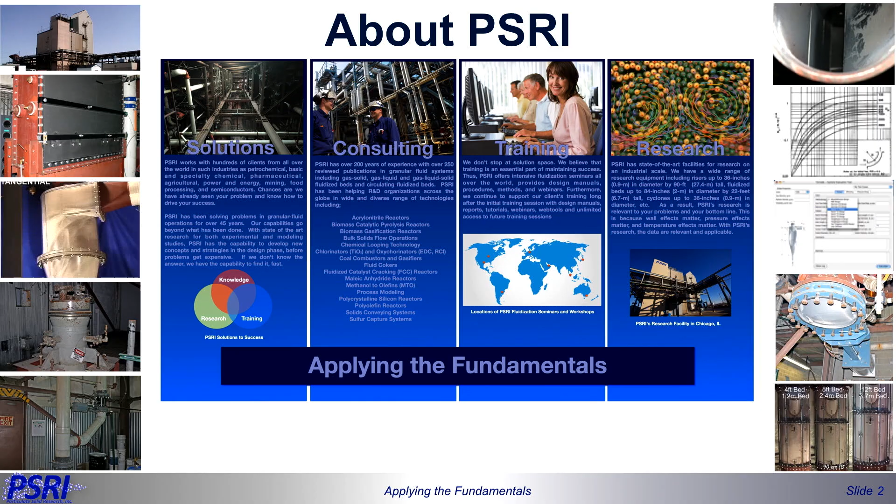So as you can imagine, doing all this gets expensive, right? Because we're not doing anything on the benchtop. Everything's done on a very large scale. So the way we have to get around this is trying to figure out how we parse everything out. So first of all, we have experts. We have about 200 cumulative years of experience within our experts. And we're world-renowned for our expertise in fluidization.

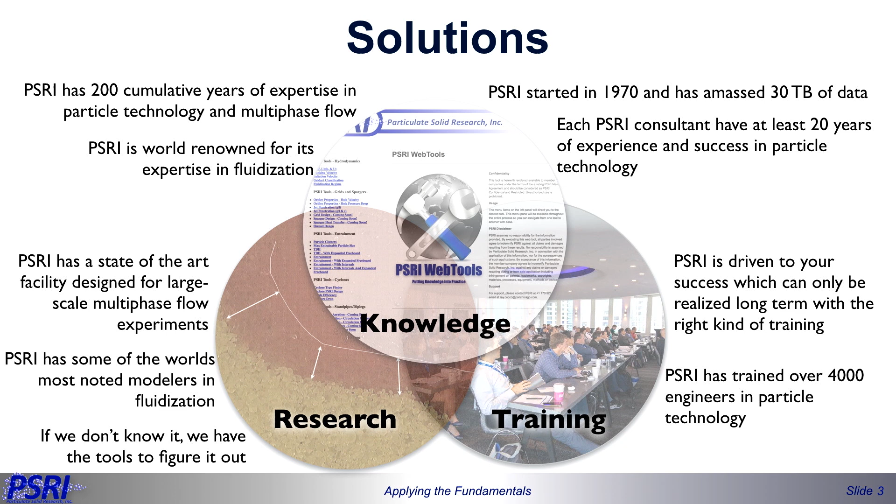We have a state-of-the-art facility with large-scale experiments. We have not just the size of our buildings and our units, but we have the blower and compressor capabilities to make all that work. I pay the electric bill, so I'm well aware of that fact.

So we also have some of the best people in the world that have worked in this area for a very long time. And so if we don't know the answer, which we probably do, we've probably seen it, but if we haven't seen it, we actually have the facility to figure it out. So that's what makes us unique. We're not truly consultants, and we're not truly just doing academic research. We're actually somewhere in the middle where we try to do it all.

As a result, we have over 30 terabytes of data on our file server, something my IT guy, Matt, is not very happy about. And if we put all that together, we provide research, consulting, and training, which gives us a nice little package for helping to design and solve real-world fluidization problems.

Manuk Colakyan was one of the researchers involved with the Unipol process and the invention of the Unipol process, and knows more about polyethylene than anybody I can think of. And on top of that, he switched gears about 10 years ago, so now he even knows a lot about supercritical fluids. So it's an interesting combination.

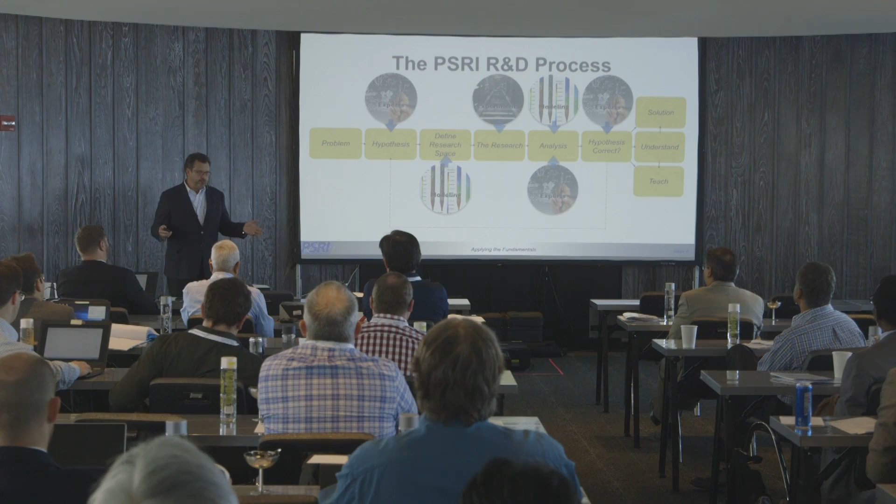Classic example is, let's say the problem has to do with a sparger design. I don't really want to put 5 or 6 different sparger designs in my unit. It would get very expensive. I like to just do two or three. So we may use the CFD modeling to actually reduce that down from 5 or 6 to 2 to 3. That cuts our cost down by 30%.

Then we do the research. Now, we're an experimental outlet, so we do the experimental research. And then we go back to analysis. Now, with analysis, you've got to go back to your experts, because remember, they've seen it all. But also the modeling part itself is part of the analysis. Remember, models are nothing more than another hypothesis. You assume that this is going to describe this behavior.

And if it does describe it, you know what's in the model, so you can say, okay, these are the fundamentals that are causing this behavior. If it's not capturing that, you go, well, I know what this model captures, and I know what it doesn't capture, so it must be something else that it's not capturing. And so I can actually go through that deduction. So that's a very important thing.

A lot of times I see people use CFD, and then they say, oh, it doesn't work, and they walk away. And that's not really the best way of doing it, because there is an answer in there. It's not an answer that's going to get you promoted, but it is an answer that may help you solve a problem, which will get you promoted.

Then you have to go and say, okay, given all the analysis, you look at your hypothesis and you say, is the hypothesis correct? And it may not be. And that means I have to start all over again. That's the scientific method. It's called research for a reason. But anyway, that's kind of how we do this.

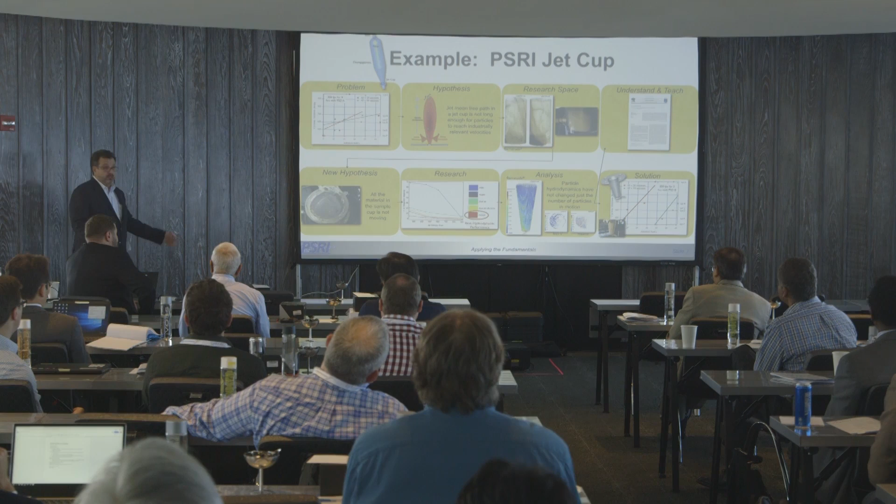So the best way to do that is we ran the CFD again for the conical cup. We saw no difference in the maximum velocity. All we saw was more trauma, which means more particles hitting each other. Basically because all the particles were moving, they were actually hitting each other. And when we go back to the test, and we tested this with respect to the large unit, lo and behold, everything lines up very nicely. So this is something we would never have come across if we didn't try to look at the fundamentals with meaningful codes that help get us there.

Here's another one I think is very interesting. This is called gas bypassing. So there was an article in the AIChE. Jan Wells was actually one of our technical advisory folks at PSRI. And he described unusual hydrodynamics that he found in an FCC regenerator. He wrote an AIChE preprint and gave a paper on this in that system. And the hypothesis was it's probably a poor grid design.

Now, in the world of fluidization, you really have to have a pressure drop that's probably at least a third of what is across the bed. If I don't, then the hydrodynamics of the bed dictates where my gas comes out, not my grid or my sparger. So we did that. We did a lot of that, because when we put the right design grid in there, we still saw a lot of this gas coming off this one side. So this is a 1-foot diameter bed. It's a pretty tall bed. And of course, we started going through what kind of regenerator Jan's was. It was an old regenerator, Model IV. They tend to have very tall beds.

So we started putting it all together and saying, that's interesting. So we started playing around with the bed height. We actually did 11 different designs, and we're like, yeah, something else is here. And we found it was directly dependent on how tall the bed was. All right, so the hypothesis basically here is that it's not a poor grid design. We're missing some fundamental hydrodynamics.

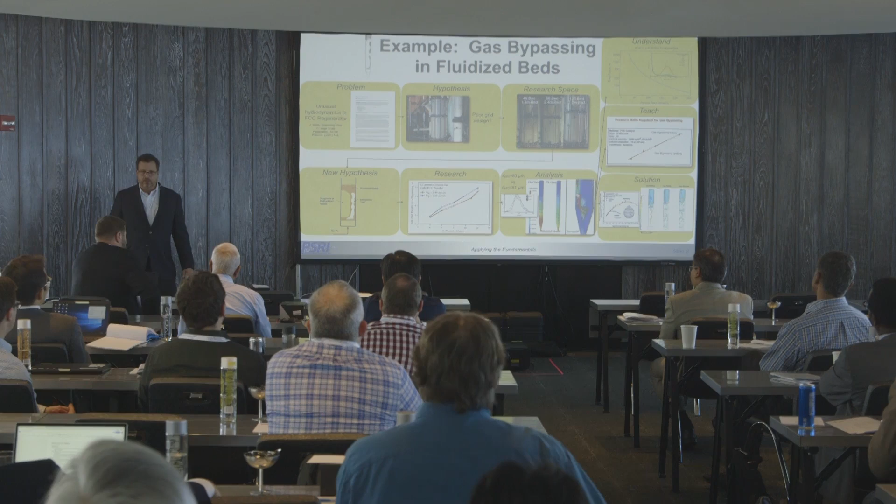So now that we understood this, we can say, how can we fix this? Adding more fines: some people's cyclone systems aren't really designed to handle this. You add fines, they just blow right out. Going to a smaller bed is also kind of hard to convince people of, but adding baffles seems to help a lot. And we were even able to figure out what the spacing of the baffles needed to be by looking at the CFD modeling and understanding what's going on with that system.

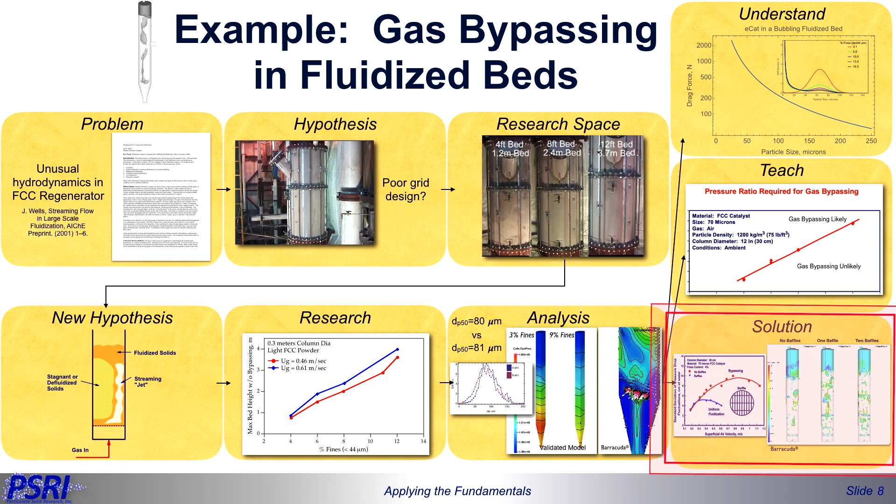So we understood what was going on. We understood that even though we look at all our particle size distributions in terms of weight or volume, it's a numbers game that we really need to worry about. We looked at the pressure ratio for gas bypassing. We actually understand when it does and does not happen based on both modeling and experimental work, and we teach that. We have tools to predict that. And we have a solution for a workaround: you can increase your fines, or you can add baffles.

The next thing we did was looking at internal strippers, all right? This is a little bit different here. This is a project Alan was actually working on. We want to understand what's going on with strippers. So our problem was strippers can flood. What happens is when they flood, I get very poor mass transfer. They're no longer stripping, so you don't want that.

And ours didn't make much sense because the holes are only this big and particles don't like to go through tight spaces. So we thought, well, maybe it's because it's more of a controlled release. That was our hypothesis. So we ran that as a CFD, with and without holes, to understand what was going on. And sure enough, yes, it's a controlled release of gas. Barracuda confirms that.

We looked at more than disc and donuts, though. We started looking at other types of elements. So Alan, you had to look at structured packing, disc and donuts, and then chevrons or tents in that system, which are the more common internals that don't need to be licensed. You saw Raj talk about structured packing, right? Because he wants you to pay an ungodly amount of money to get that license.

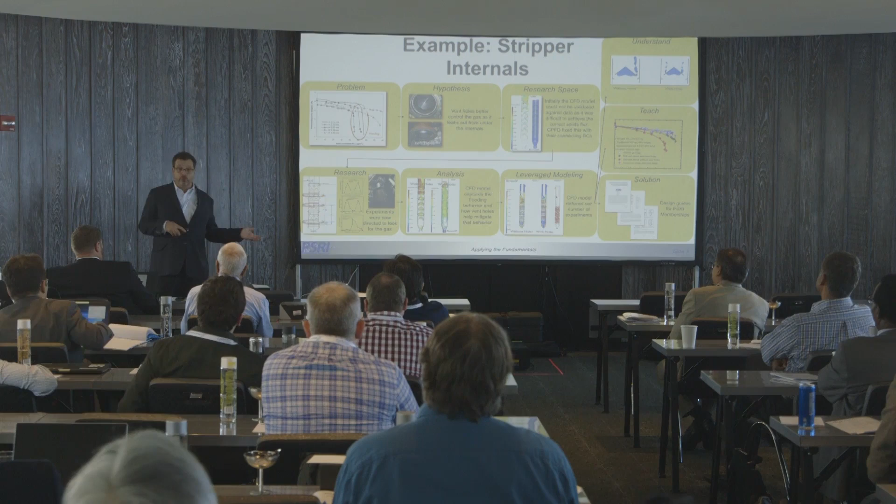But nevertheless, we said, okay, we understand this makes sense. It gives us something we can understand. What does it do with tents? Now, these experiments, Alan was doing this in a 3-foot diameter stripper. We did it in a 2-foot diameter stripper and found out it did not relate to industrial practices. We had to tear that down and put in a 3-foot diameter stripper.

Okay, how much did we spend on you, Alan? Yeah, $260,000. How could you forget that number?

And so we put in a bigger stripper in this system. He was able to map out where all the gas is going and everything else like that. Now, chevrons or tents tend to have holes in them by default. Disc and donuts, not always. So we thought we don't need to run it without the holes, until one of our clients says, oh, wait a minute, we have no holes.

That would have been a very expensive run, but the client was very happy with the Barracuda results, so we just ran that simulation to show that the different behaviors we see with and without holes were consistent with what we saw with the disc and donuts. And that saved a lot of money. We actually leveraged modeling to help us get to where we needed to go.

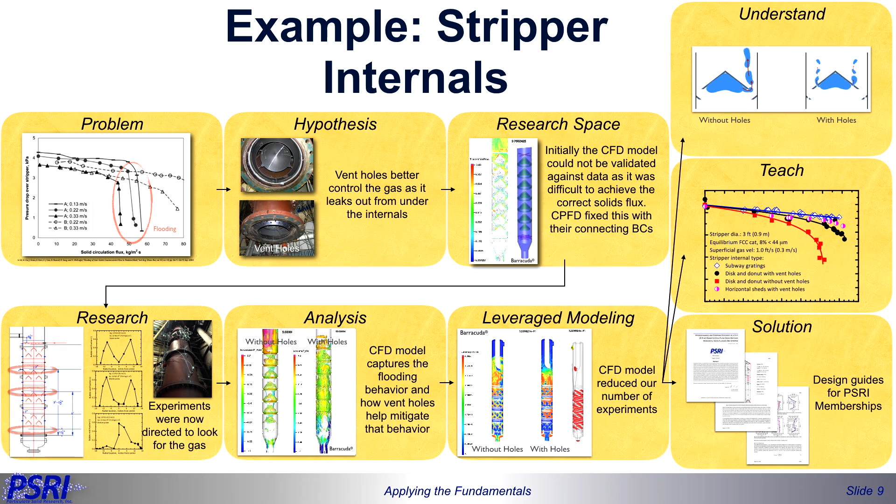So it's not just a tool to reduce my number of experiments, not just a tool to do analysis. I can leverage it, once it's validated, to be more predictive. And so, of course, then we have all this data, which we teach. We have quite a few tutorials on this, including webinars, and we probably spend about half a day on it in our seminar, and we have lots of reading material on how to design strippers.

The next thing I was going to talk about is the eccentric cyclone tubes. If you were at our PSRI technical meeting this week, this is what I was talking about. There's a nice article by Muschelknautz, a father and son team. They talked about skewing the outlet tube over a little bit, and they get much better performance out of their cyclone. They've actually applied this for large cyclones and combustors, so there's some merit here. So that was the hypothesis.

And so we're now currently running this in what we call research space. We're looking at a bunch of different designs. First of all, we confirmed, yes, it is able to show that we get better collection efficiency when we do that skewing.

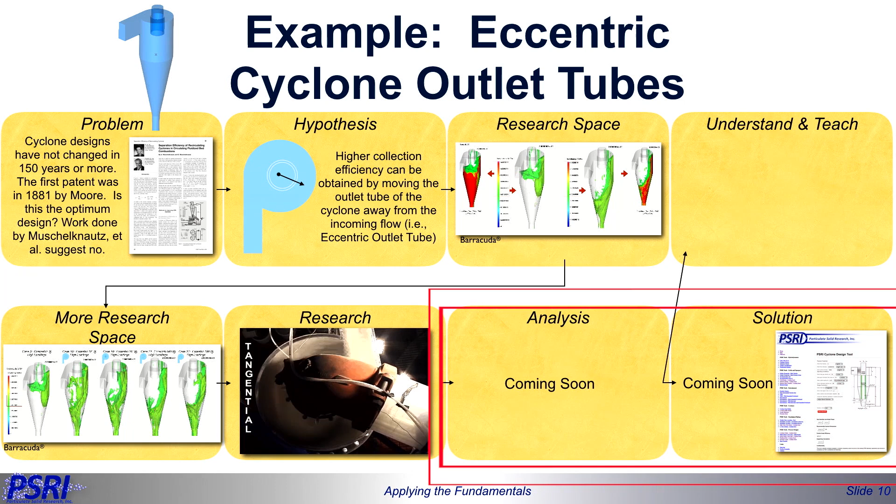It even showed us why that happens. We even played around with other different configurations to do that. Now we're at the part of saying, all right, we know what we need to do. We know, instead of just blindly moving this thing around to figure out what's going on, we can actually just pin it down to a couple different experiments, which we're going to be doing, and we're going to get there. Okay? These things are blank because we just haven't done it yet. So we're going to get there with that. So that's our research process.

Okay? But there's more. I mean, we do more than that. There's also other things we have to worry about at PSRI. One is reliability. Okay? And that is a classic example. Because with the classic examples, some client or clients come to us saying, this is a problem. What's going on here? How can we get around it? In other words, I can't keep my unit running as long as I need to keep it running.

All right? So, you have a historical perspective. What's the history? Is this something new? Has it been going on for a while? Where is it happening? Experts, okay? Then you get the experts together and develop the hypothesis. Then you work on the research. Now, the research could be experimental or experimental and modeling, etc., okay? Kind of replicate what's going on and then come up with an analysis of it and then figure if the hypothesis is correct. Now I have a solution. Teach it, understand it, basic stuff, okay?

What does this actually mean? Here's a classic example. So there was this result that came out in 2006 that clearly showed for fluidized cat crackers, the number one problem for keeping that unit up and running were cyclones, okay? Cyclones in the reactor, cyclones in the regenerator. All right? The problem was a huge amount of erosion in the secondary cyclone in the cone region.

So the hypothesis was, we had a historical perspective associated with this, and Shell, right, they have this vortex stabilizer. They actually came to us saying, you know, we don't have this problem. We'd like you to look into it because we know it works. We just don't know how it works or why it works. All right? So we had Shell's blessing to look into this. This thing's been around since 1989. Shell was smart enough to pick it up in 1990.

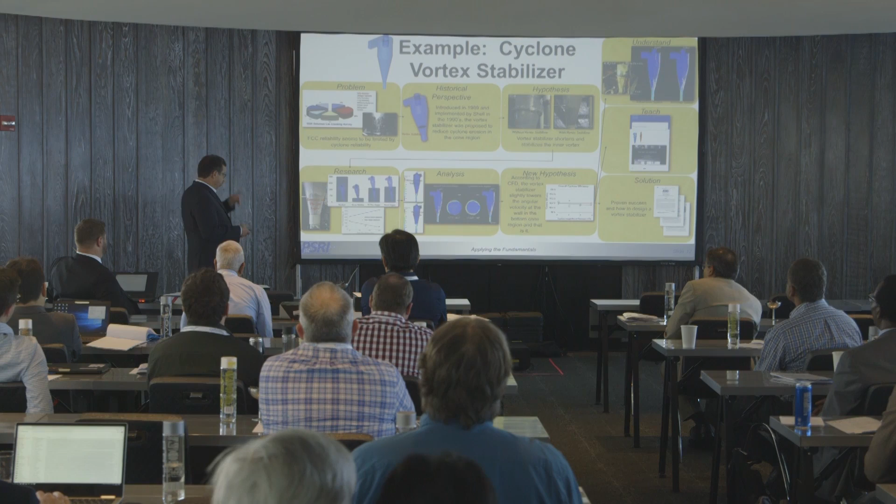We've been working with this vortex stabilizer for a while now. It has other advantages as well, which CFD has actually helped us with, but I'm not going to talk about that. What I am going to talk about is why is this working. And the hypothesis that it's stabilizing this inner vortex in the cyclone is not really correct. What it's doing is it's changing the vortex just below in the bottom region. It's reducing the amount of swirl slightly.

Now, erosion tends to be a function of the angular velocity squared or cubed. Small changes make a big difference in erosion, and that's all we're doing here. And that's the beauty of it. That's why I don't really see my grade efficiency being hit that much. And that's why we actually see a pressure recovery, so I can even use shorter dip legs with these cyclones. For once, Mother Nature has given us something that's not painful to implement. So that's kind of it.

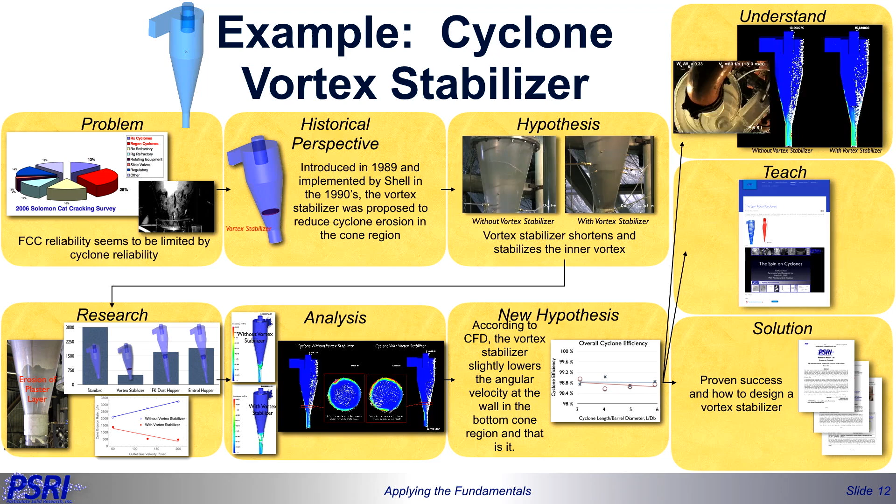So with the CFD, we developed an understanding. It changed our hypothesis. And then we actually now teach this. We have tools on how to design all this stuff, and we have lots of papers in there to help solve your erosion problems with respect to the cyclone.

How much time do I have? Am I going too far? Two minutes. Okay, I'm almost done here. But this is really good.

The next thing is the PSRI design and scale up process. Same thing. You have a problem. I have a small concept here. I want to make a big plant here. That's called scale up. It goes through a design. That's where your experts come in. And now you have to say, what are my design parameters I need to worry about? The scale up parameters that are scary. You have to understand that. The experts are also very important there. You also start doing cold flow studies to understand what those parameters actually mean.

So, classic example, the gas bypassing problem. With this particular catalyst and the particular system I have, how deep of a bed can I have before I think I'm going to have a problem? If I am going to have a problem, I'm going to spend a little bit more money to put the internals inside of it, the baffles.

Then you go through the analysis with the modeling, because cold flow gives you a good understanding of the hydrodynamics, but it's cold flow. Your process is not going to be cold flow, and it's not going to be with air or nitrogen. It's probably going to be with some reactant at a higher temperature to make a product you want. Our product is just more air, or the same air, just a little dirtier until it gets to the baghouse. So you have to bridge that gap.

Now, going to higher temperatures, going to different pressures, using different reactants, that's changing your drag. Now, we can do that with cold flow. We just adjust the velocity to match drag, but we're going to want to use CFD to really make sure we get there. The tool is mature now. It can actually be a useful tool for scale-up. I'm not sure I'd make it my only tool, but it certainly would be one of my important tools for this area.

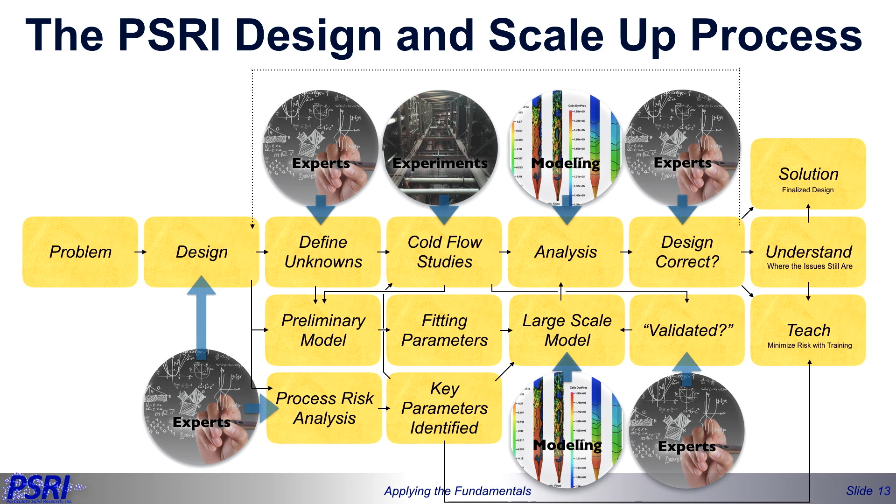There's another part you need to worry about. It's called process risk analysis. Take your design and sit there with your room full of experts and say, what could go wrong? And if it goes wrong, where is it going to hurt? So you may have to look upstream and downstream and everything else like that, but if you don't go through this process, you're going to build this plant, something's going to go wrong, and it's going to cost you twice as much money and twice as long to actually fix it. And that also could involve some of the modeling. Your large-scale model can be a very important part of that, okay?

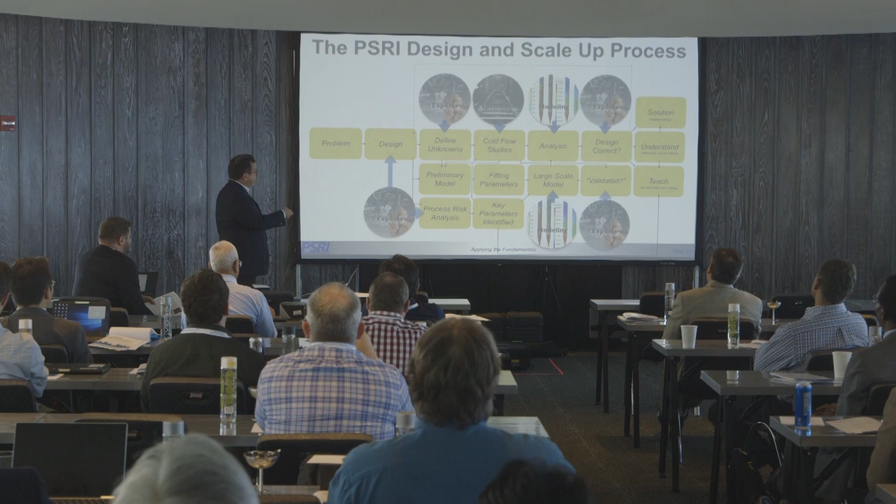Like fines. Oh, if my fines level drops below 4%, I'm going to have problems. What are those problems going to be? I'm going to get gas bypassing. Well, what's that going to do? Well, gas bypassing could shut down the cyclones in my regenerator. That could dump a lot of solids downstream. Can I handle that? If you can handle it, you know you don't want it, but it's not as critical. So that's the 3 steps that we typically do in terms of looking for the scale-up.

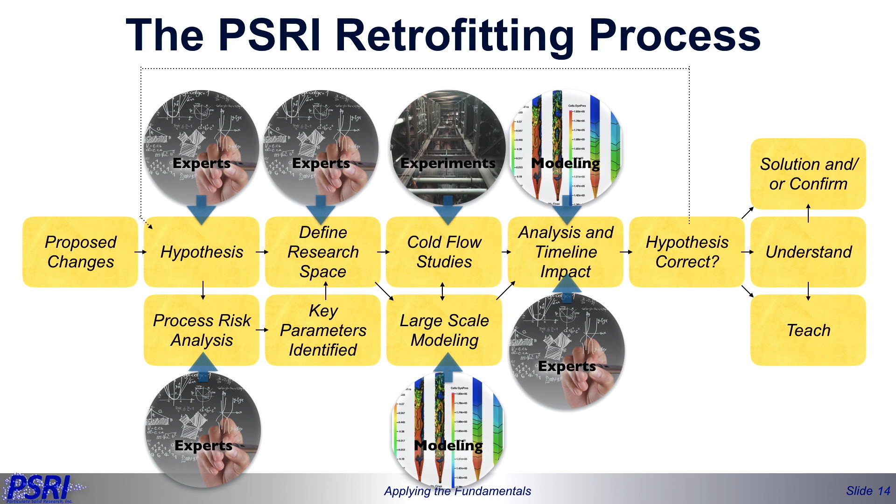And finally, there's the retrofitting, right? You have an existing plant, and you're saying, look, I just want to make it better. I want to do it as fast as possible, as cheap as possible. So you go through kind of a similar type of analysis here. Process risk is also very important in that, and you still probably should develop a large-scale model to get you there, because it will help you understand better what you're implementing and what some of the risks are associated with that.

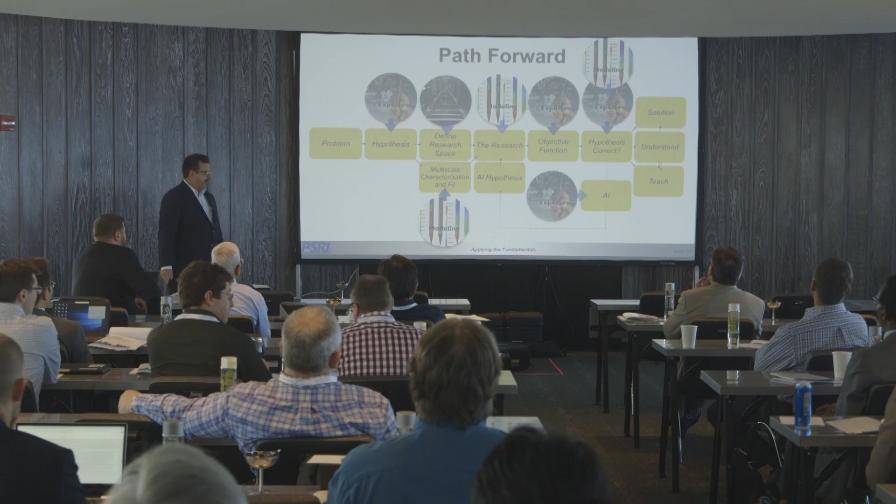So, path forward, same thing: problem hypothesis, use experiments and modeling to help define your research space. Use experiments and modeling to help understand what's going on here. Now it's going to be a little bit different, okay? Artificial intelligence is actually coming into reality. And there was a talk by the NETL guy, I forgot what he called that code. What'd you call that, Jason? NodeWorks, yeah. I know the Siemens folks have something called HEEDS as well.

Basically, you can actually take these codes and put them through some sort of objective function. This is the answer I want. I want to solve onto this. This is what I can change. And it'll just run this in a continuous loop, making smart, educated guesses on how to do this. So you can use some numerical technique like simplex, but artificial intelligence will get you there faster. Because CFD takes a long time, I don't want to use the simplex method. That's really painful. Artificial intelligence will make that actually achievable.

So you're going to actually now see us having more refined solutions by integrating CFD with artificial intelligence, with experiments and cold flows, validating what's going on in the whole process. It would be a good recipe for success. So that's my vision of where we're going in the future. So in respect, doing this kind of work involves experiments, it involves modeling, it involves experts. I don't think you can remove any one of those.